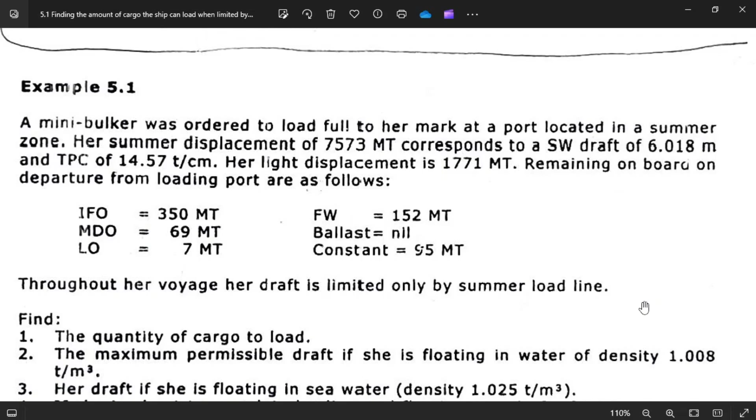Remaining cargo on board departure from loading port are as follows. So this is his ROB, and throughout her voyage she is limited only by summer load line. So she has a limiting draft, which is the summer load line.

The question is the quantity of cargo to load. How much will be our maximum cargo to load? The maximum permissible draft if she's floating in water of density 1.008 - meaning, what will be her draft if she floats in a density of 1.008? Remember, her maximum draft would be the summer load line or summer draft.

Her draft if she is floating in seawater, 1.025. If she is about to complete loading, meaning almost completed loading, and she's floating at a draft of 5.90 meters in water density of 1.008, find the quantity of cargo remaining to load.

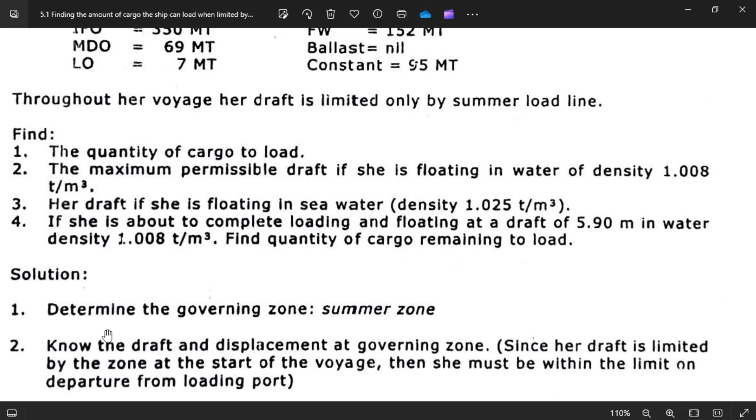Okay, so this is now the solution, guys. Determine the governing zone. The governing zone is summer zone. Now the draft and displacement of the governing zone - we must know the summer draft and the displacement at the summer draft.

Since her draft is limited by her zone at the start of the voyage, she must be within the limit of departure from the loading port. So throughout the entire voyage, the vessel must be within the limits of the summer zone or summer draft. Departure draft in saltwater is 6.018 and the displacement is 7573.

Let's check this one, guys - she's in summer displacement. Her draft would be 6.018 and her displacement would be 7573. So this 6.018 and 7573, and her TPC is 14.57.

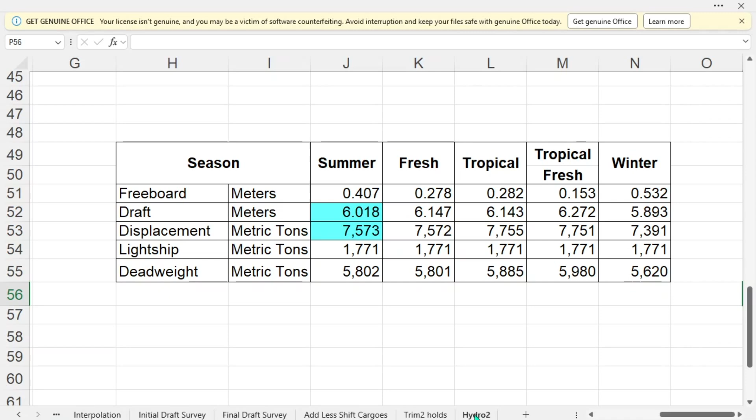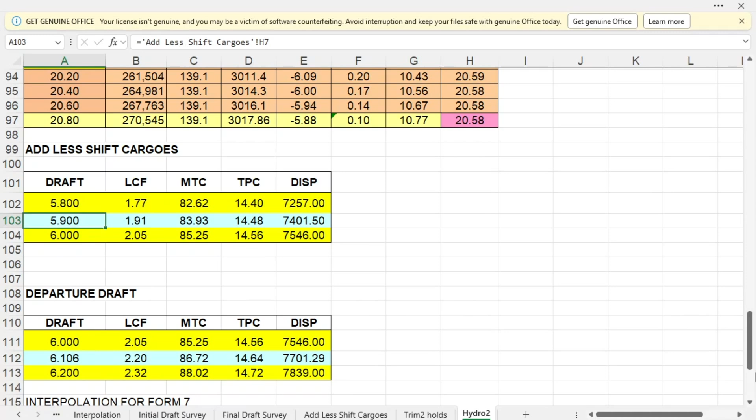Let's check, guys - 6.018. So 6.018, is that right? Put here, wait a minute. Here, 6.018. And the displacement is 7573 - it is already run up. 7573. And TPC, what will be the TPC? TPC is 14.57.

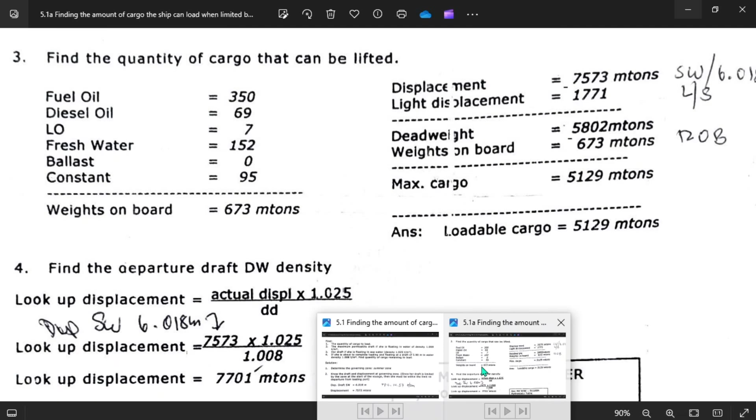So let's go to number 3. Find the quantity of cargo that can be lifted, meaning this ROB - what will be, how much can be asked for the maximum cargo to load. So we have fuel oil here, diesel oil - this is all the ROBs.

Lube oil 7, freshwater 152, ballast 0, and constant is 95. Total weight on board is 673, meaning your ROB, with the displacement, which is your summer draft, which is this one.

Summer draft displacement is 7573, and your light ship is 1771. Deduct this, then this will be your dead weight, which is 5802 metric tons, minus your weight on board which is 673, and that will be your maximum cargo to load - 5129. So the answer for loadable cargo is 5,129 metric tons.

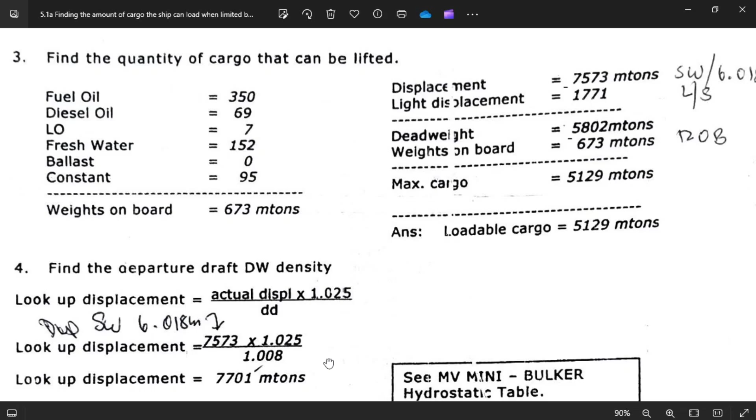So then we go to number 4. Find the departure draft in dock water density - so what will be the draft when she floats? Okay, so the formula is: look-up displacement, actual displacement, times 1.025 over your local density.

Look up the displacement, which is now the summer draft, or 7573, times the constant of 1.025 over your local density 1.008, and your dock water displacement is 7701 metric tons, and the draft would be 6.106. So let's try to investigate this one, guys.

7701. Okay, 7701. This one, 7701, and the draft will be 6.106. Okay, check 6.106 - there you are. Okay, then number 5.

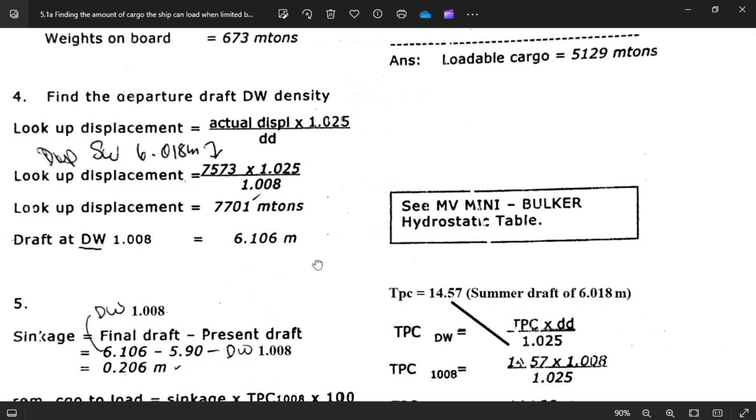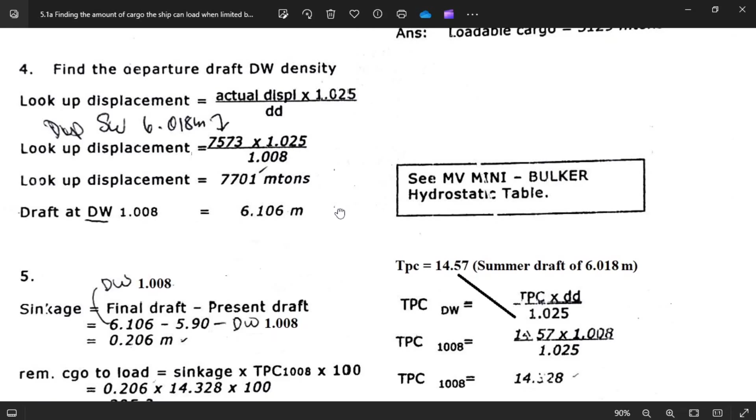Find the sinkage. Sinkage will be your final draft, which is your departure draft, or 6.106, which is this one, minus your 5.9, which is prior to completion - this one, guys.

When she's about to complete loading and floating at a draft of 5.90 in water density of 1.008 - okay, so with this prior to completion, when you reach this draft, you will have to compute your cargo remaining on board. Okay, so let's go.

This will be your final draft or departure draft, and this will be your draft prior to departure, or for you to compute the cargo remaining on board. So with this 6.106 minus 5.90, this will be your sinkage of 0.206 meters. Remember, guys, that you are in brackish water of 1.008.

Then remaining cargo on board, remaining cargo to load - the formula is sinkage times TPC times 100. But he has interpolated this TPC converted to the local density. So this is the TPC of the summer draft, 14.57, which is this one, guys. With this summer draft, your TPC is 14.57, or we'll just check the program.

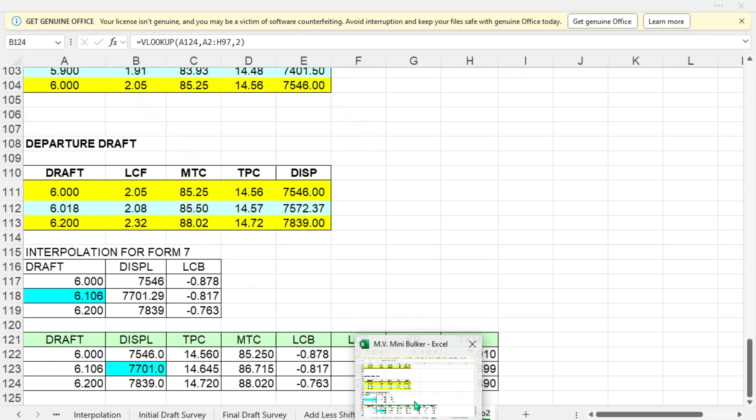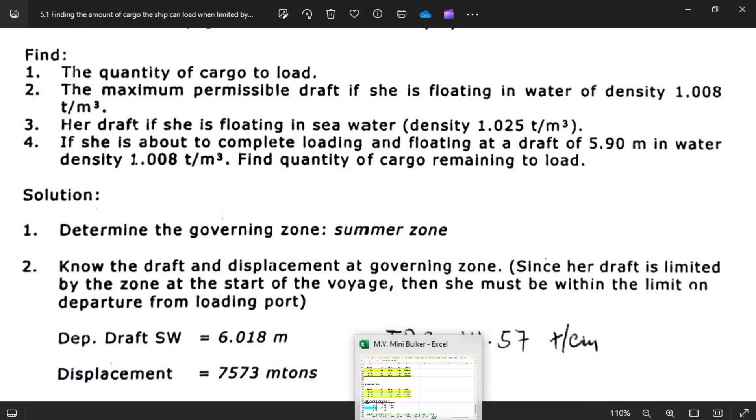TPC is - how much is the 6.018? Okay, 6.018, put this one, 6.018. The TPC is 14.57. Okay.

So with this, TPC of dock water equals TPC times local density over 1.025. So you bring down this TPC of 14.57 times the local density of 1.008 over 1.025. Your TPC for dock water of 1.008 is 14.328, which is this one, times 100, and your remaining cargo to load will be 295.2, or the answer would be 295 metric tons.

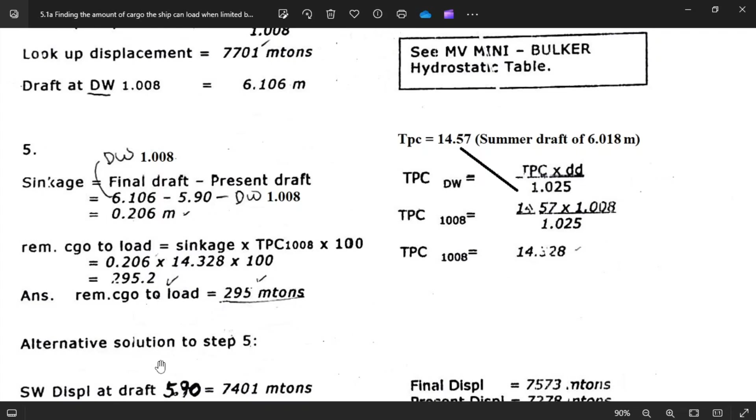Okay, and an alternative solution to step 5 will be: your saltwater displacement at draft 5.90 is 7401. So let's investigate this one, guys - 5.90, put here 5.90, your displacement is 7401. Okay, 7401.

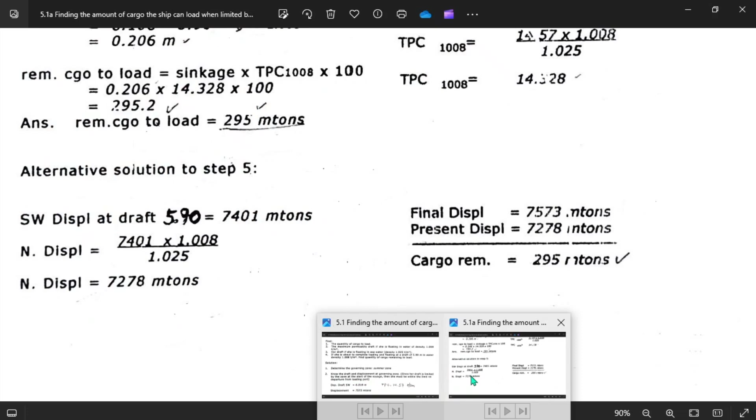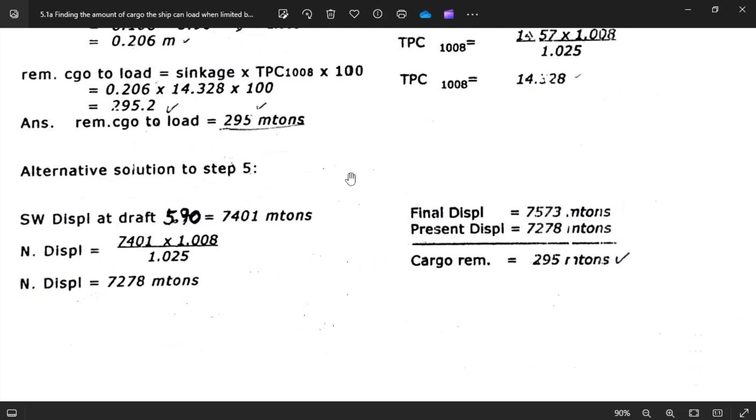7401, and your displacement is 7401 times 1.008 over 1.025, and this will be your new displacement of 7278. So with the final displacement of 7573, which is your summer displacement minus your present displacement of 7278, you deduct this one, then you will have 295 metric tons.

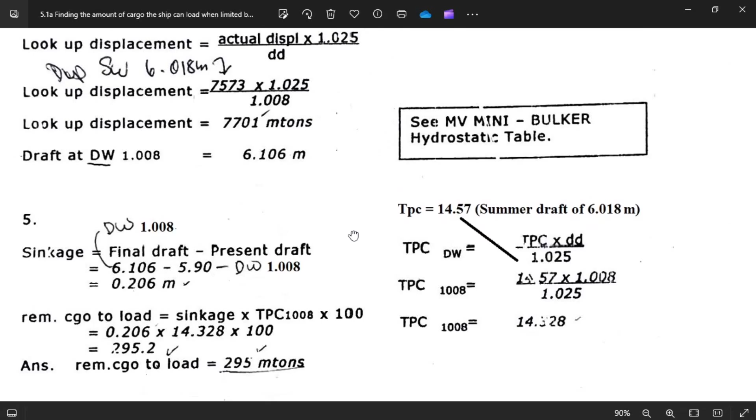Okay, so by investigation we'll try to use this sinkage. Finding this sinkage, we'll try, this will be your departure draft, final draft or departure draft. So we'll try to put this in our program.

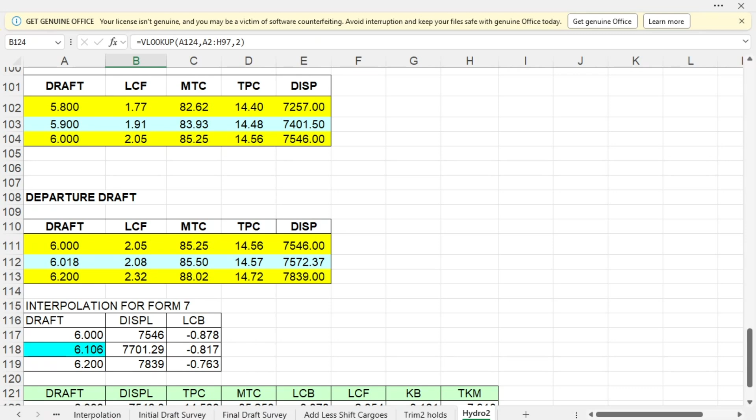6.106. Put this one. So put this 6.106. That will be our departure draft, which is this one.

Then this will be our draft for, to get the remaining cargo remaining on board, or to get the sinkage. Okay, that will be 5.9. That we take a draft.

So the vessel, for example, is the foreman has to ask to stop the vessel loading because he has reached the draft for trimming, and when he reaches the draft of 5.90, so you have the vessel has to stop loading and check draft reading around the vessel.

So for example, port mid port you got 5.90, and starboard you got 5.90. Then you have mid of 5.90. Then you have a sinkage of 0.206, which is this one, guys.

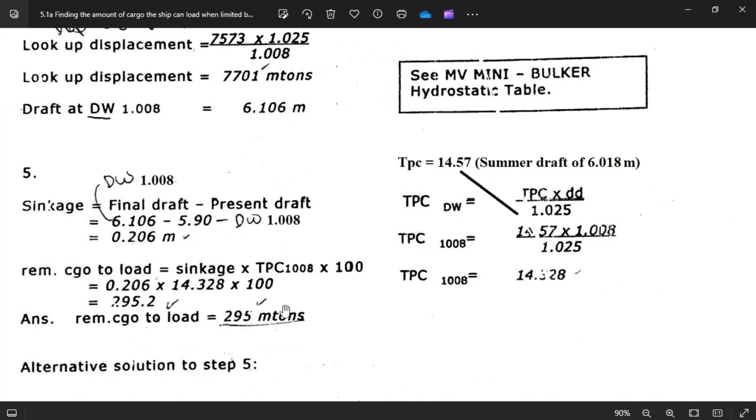Okay. Now, look, guys, I don't have to put the interpolation. He's using the interpolation for this TPC of local density 1.008, which gets a value of 14.328, which is this one. But look, guys, I still got the same answer of 295 by using

the final draft of 6.106, and I got 14.64, and he's using 14.328, but I get the same value here. So

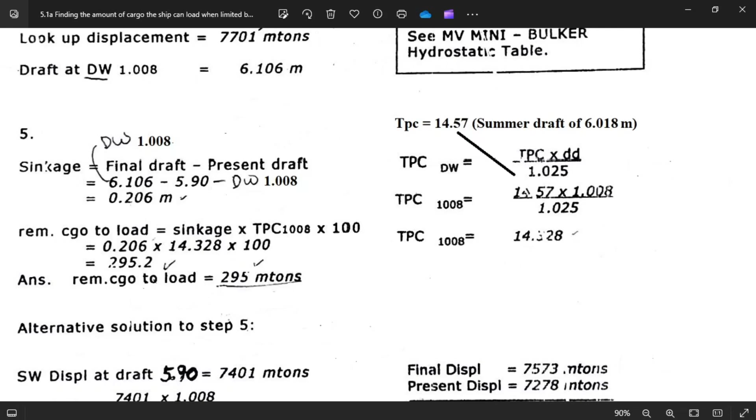when you get the remaining cargo to load, follow the arrow, then put the value here, 295. Once you load 295, what happens?

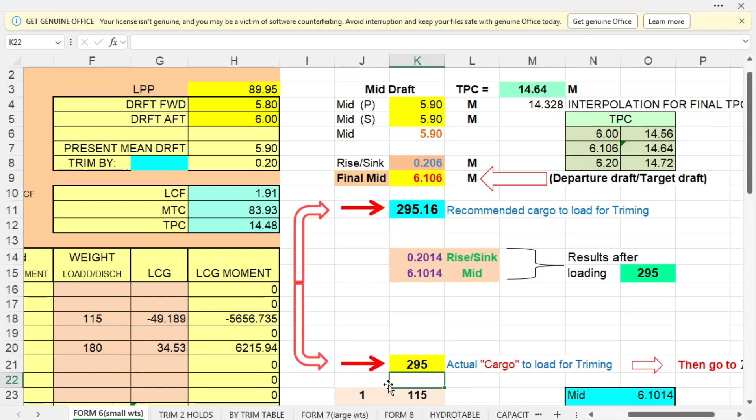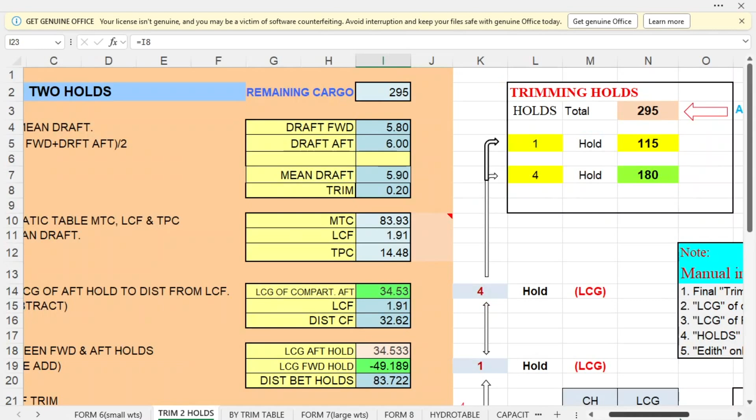will be 1 and 4. So you go to trim 2 holds, which is one, trimming with 2 holes. You get the remaining cargo of 295 here. And you get trimming holds or trimming cargo of 295.

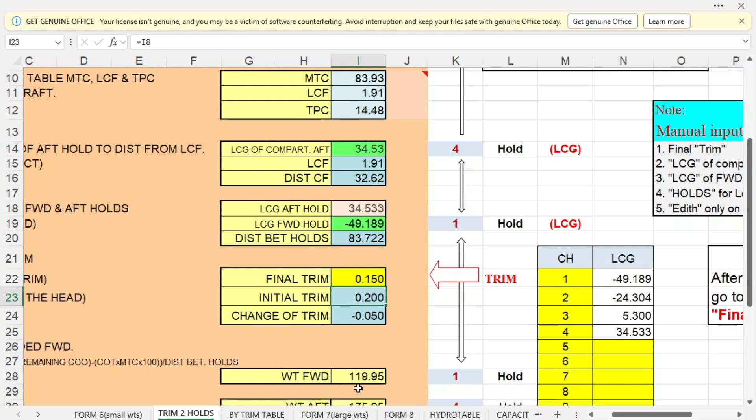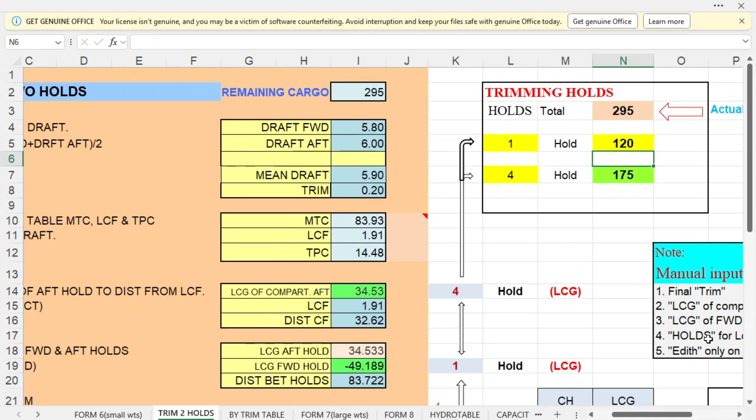Then what will be your trim? Say you want a trim of 15 centimeters. Okay, 15 centimeters. Okay, what will be your cargo in hold number 1 will be 120. Put here 120. Number 4 will be 175.

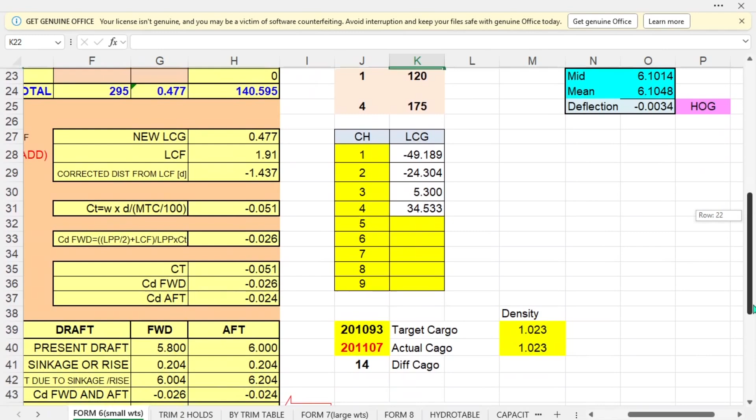175. And your departure draft will be forward 6.03, aft will be 6.18, and you have a trim of 15, which is the same here. And your mean draft is 6.10, and you have a 0 deflection. The other side, which is

how to find trim when handling severe moderate weights. Your draft forward is 6.03, which is the same here, and aft draft is 6.18. That is 6.18, and your trim is 15. You get a trim of 15, and your mean draft is 6.10,

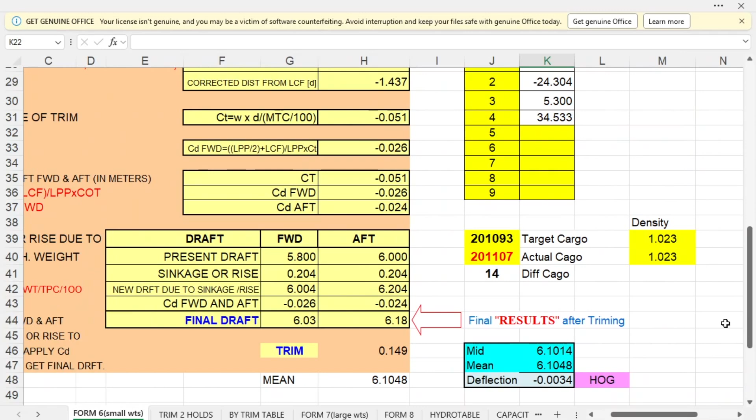and you have a 0 deflection. Okay, so that's it, guys. From the problem, you only need to show how you get this remaining cargo to load, but we make it a point that upon departure we will have the forward and aft draft.

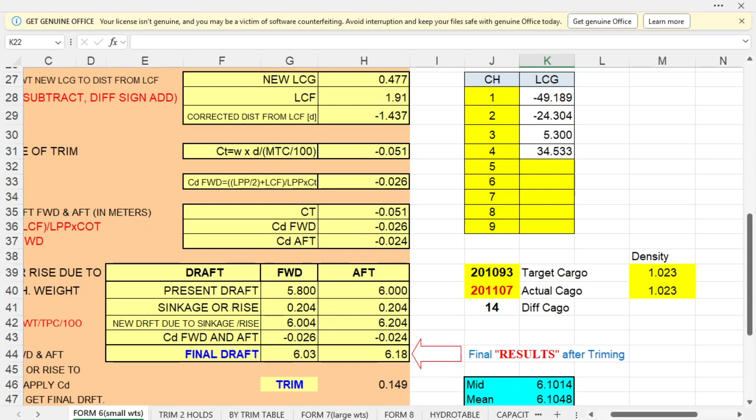Okay, but you can, like say for example, we have a trim here of 15 centimeters, but we want to have a trim of 20 centimeters in your departure. So you just put this 0.20, and how much will you load in number 1? That will be 115. Okay, 115.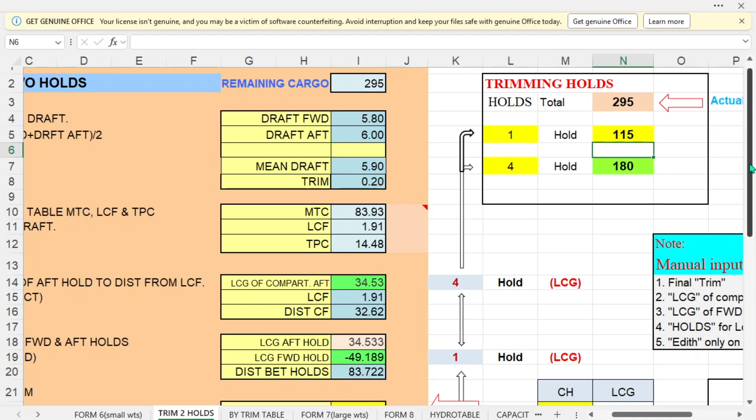Is that correct? Number 4 will be 180. Okay, 180, and your draft forward 601, and aft will be 621, will trim of 20 centimeters. Then you still remain the mid of 6.10, and you have a 0 deflection here.

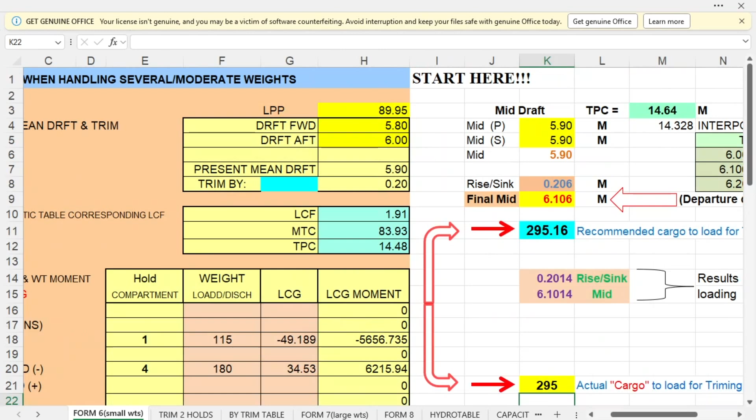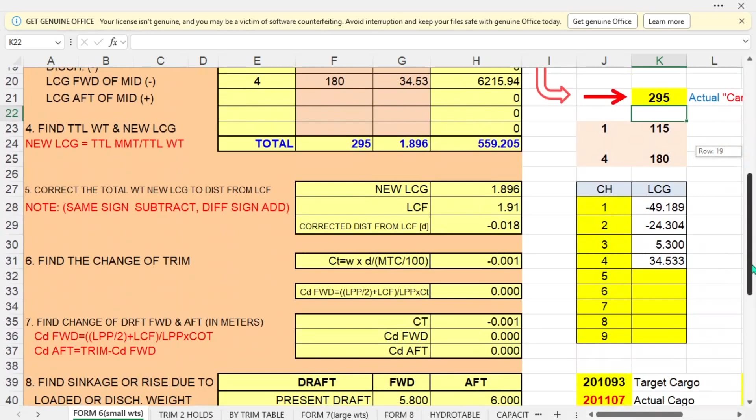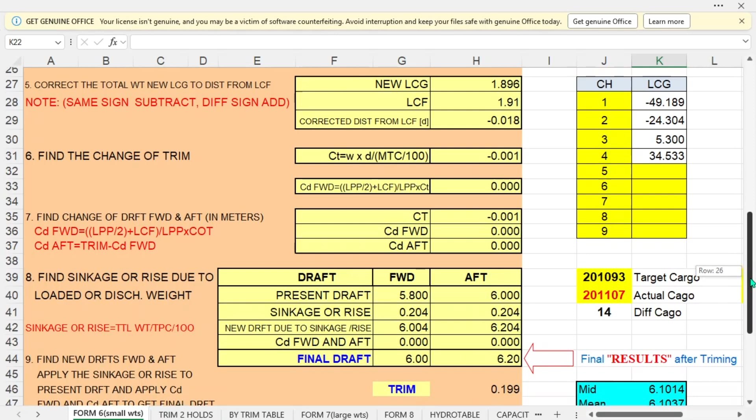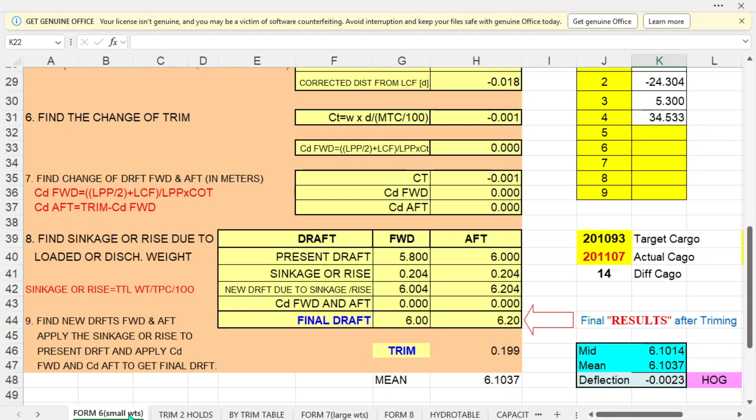So let's check on the other side. With handling how to find trim when handling several weights. Your final draft here would be forward is 6 meters, aft will be 6.20, and your trim is 20 centimeters, and you have a mean of 6.10 and 0 deflection. 6 meters here, you got 601 here, and you got 620, and you get here 621.

Okay, what's important thing is you get the mid draft of 6.10, or the departure draft of mid of 6.10. That is very important. Okay, that's it, guys.